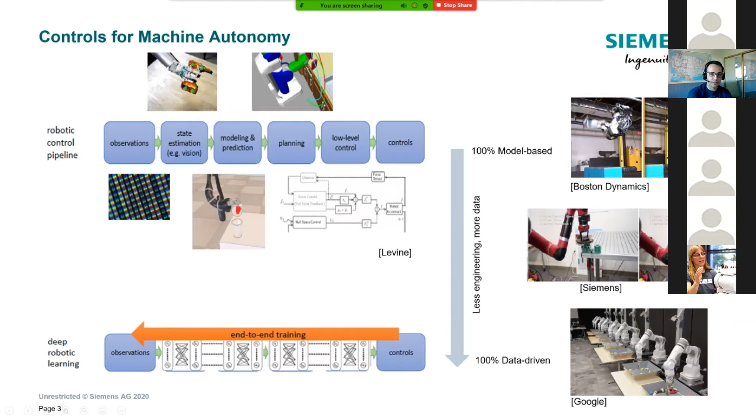But even within this continuum, the question arises: how do you compare different algorithms? What you're seeing in the video—hopefully these render—are robots trying to do different types of tasks, some failing, some succeeding. In the end, what we want is to define these kinds of artifacts, these benchmarks, to be able to compare different algorithms.

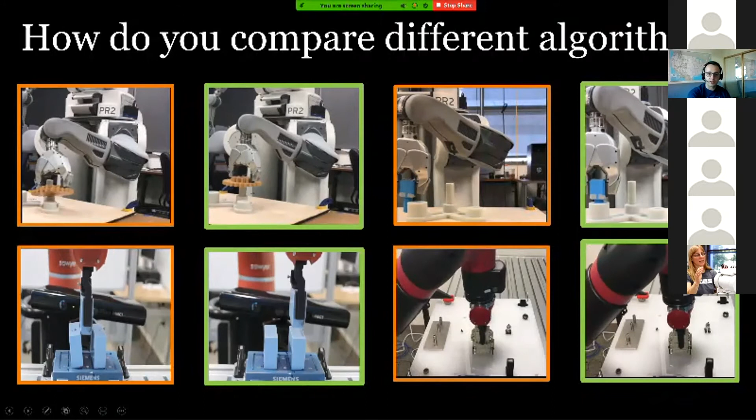I'll talk about all these different benchmarks in a second. This is part of our gear assembly—something we call the factory model. And this is the by-now-famous NIST board.

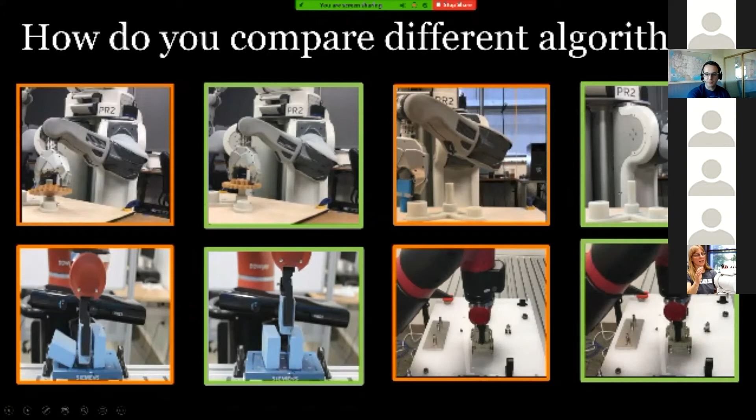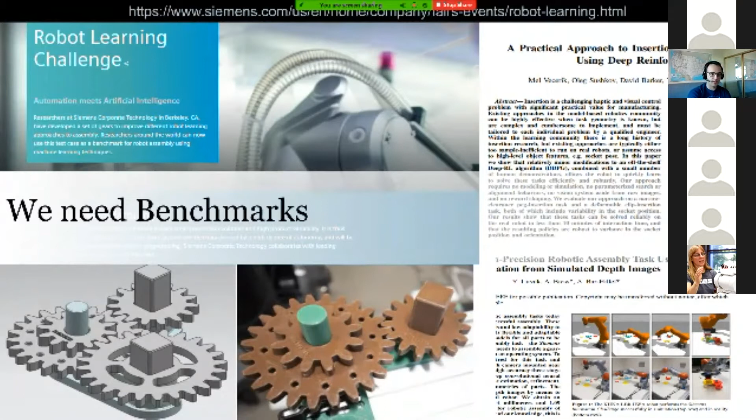So, we need benchmarks. I was also very happy to see in Joao's presentation that somehow the gears appeared there, and this has had a lot of utilization in different labs around the world. But what we really believe is that benchmarks accelerate innovation.

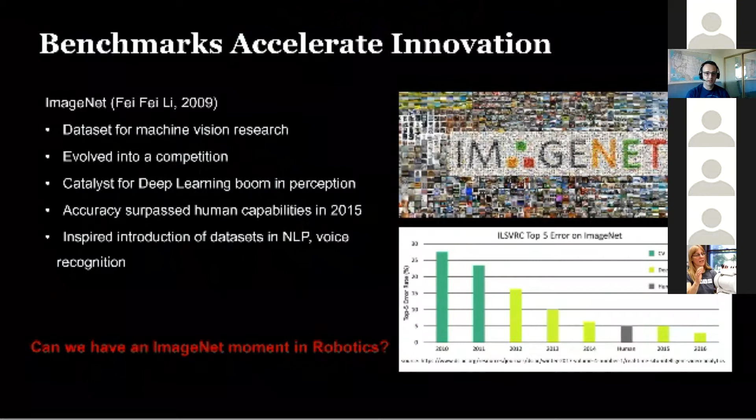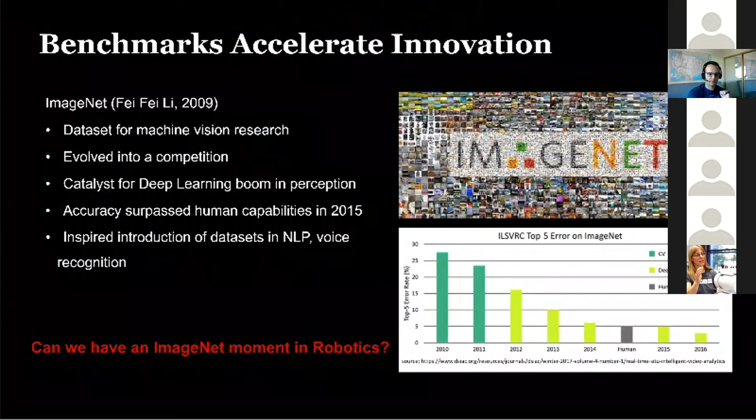Everybody knows about ImageNet and how it served as a catalyst for the deep learning boom in perception. The question is: can we have an ImageNet moment in robotics? Because that was really what accelerated the deployment of deep learning in computer vision.

Now, why benchmarking in robotics? This has been discussed in several other presentations. Every paper reports a different experiment, and it's unclear what the contribution is. We need to be able to reproduce results better, and we need to be able to say we are this good.

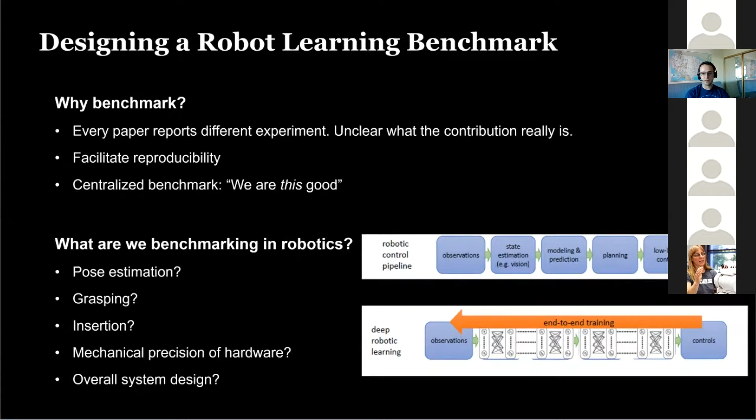But what are we really benchmarking in robotics? That goes back to conversations in other workshops I've seen at past conferences about what robotics really is. Are we just doing pose estimation benchmarking? Are we benchmarking grasping capabilities, insertion capabilities, the mechanical precision of the hardware, the overall system design, all of this together? And when we talk specifically about robot learning, it's very different whether you want to benchmark and learn for control versus learning for perception.

The performance really depends on the physical effects, and it's also not realistic to expect that every lab in the world has the same hardware and the same physical environment.

There's a really big difference between simulation and the real world. There was a really good workshop yesterday on sim-to-real, particularly when you talk about realistic tasks that want to find their way into manufacturing. There are things like OpenAI Gym, where you have environments, not just agents, but these are mostly academic scenarios, not suitable for manufacturing. As much as I like to see dinosaurs learn how to play soccer, as in some papers, it is also limited in applicability because of the simulation.

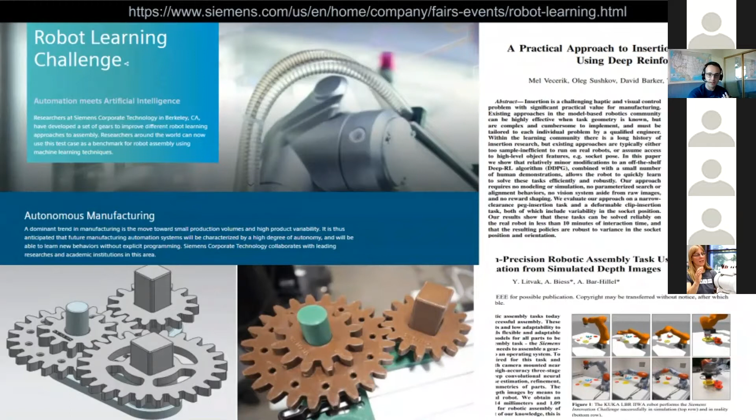It's only in simulation, so can we design a physical benchmark environment? That's what motivated us more than 4 years ago to create this robot learning challenge, where you can see the link on top. We decided to create a physical benchmark where researchers around the world can simply 3D print the parts and try out this assembly. It consists of different parts: two peg-in-hole problems with pegs that can move, and different gears, the three you see, and another one with a different pattern, so you don't overfit to a specific solution. Everything moves, so it gets very tricky. It's not easy to hard code the motions, because at the end, you need to find your way when assembling the gears.

This has been used by different labs in the world. For example, this is a paper from, I believe, DeepMind, and this is another paper from the academic world. We were very happy with the reception of this challenge and how different labs around the world have used it. But it's not that one benchmark fits all.

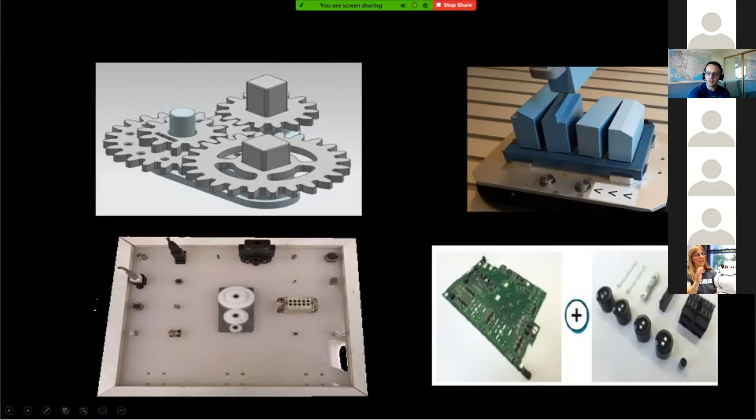It's not a silver bullet. So we also have, I'm going to report some results with a different kind of setup where things can also fall, and that may be also different and useful for different setups. But these two still are very lab oriented. One can claim that this is not a realistic manufacturing problem.

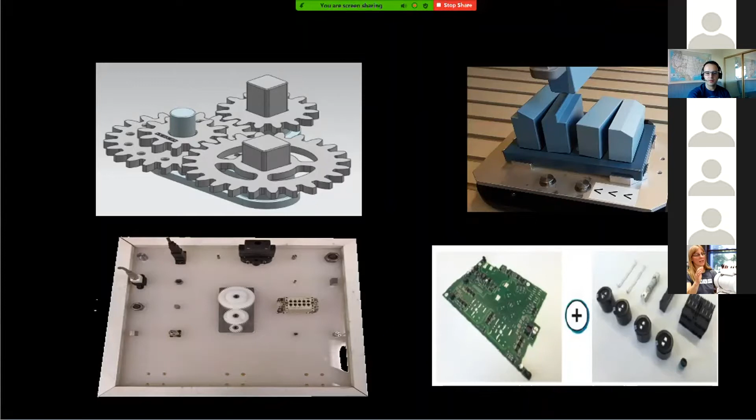We were also very happy to partner with NIST and do a lot of tests and work around the NIST board. But even there, that's also kind of an artificial environment. The next step, what we are pushing currently, is also using a realistic through-hole electronics assembly from a real product, and that will complement the full picture of benchmarks.

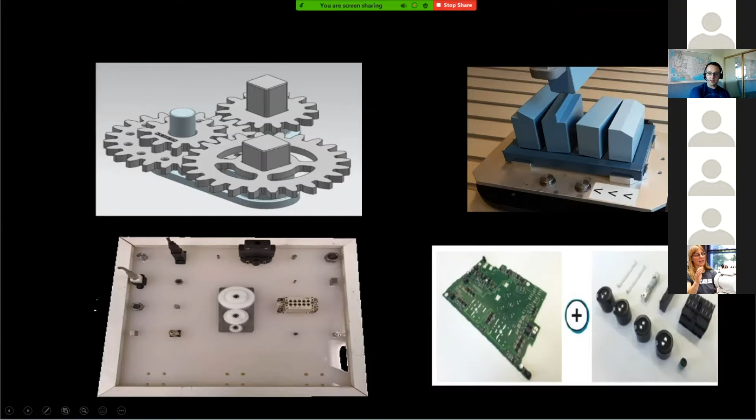Now, when we give these benchmarks around, or people want to tackle our challenges, it's not easy to just say, okay, report me your results. Because what we want is to answer different questions, and we really want to take a look in the details, because different setups are, it's difficult to say this is better than the other one. Because usually, the answer is, it depends. It depends on the conditions.

So the first question we always ask is, does it work? As you saw on the videos before, some robotic actions work and some others not. Also, how robust is it to perturbations, for example in lighting? Are you controlling the light or not for your perception algorithms? How well does it generalize? What if I place the components, if I move the board slightly, or the components you're trying to pick?

At what cost? It's very different if you use an Intel RealSense camera for $300 versus, for example, a Photoneo $10,000 camera. You get a very different output, but also that's what you pay for.

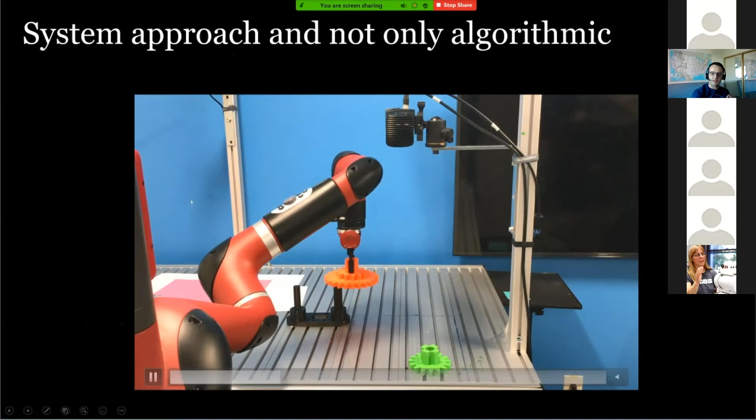Also, what cost in terms of data, how much data you need for training, and how much time it takes if you're learning the policy that finally works, and also how to set it up for another person to run it. These are the least academic questions, but if we want to transfer this into real manufacturing, that will be very important. And what are the limitations? As I said, in the following video, the way we made it work was also using a $10,000 camera, which produces these really nice point clouds, as you can see here. So we want to know also the setup. That's equally important as the algorithms you are using.

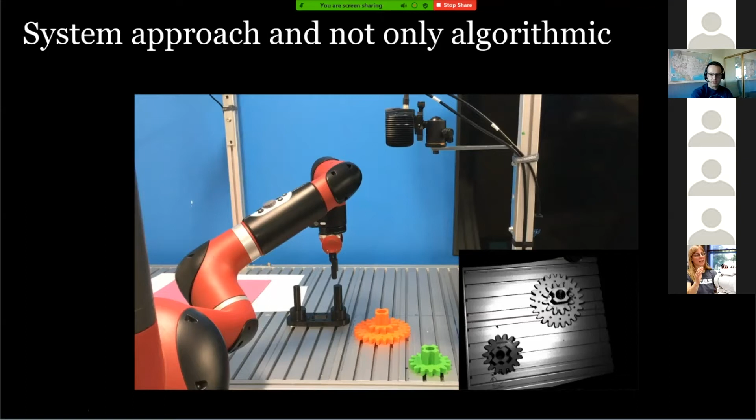Now that I've drilled the topic more on why we need benchmarks, I want to show you some examples on how we use these benchmarks in our research.

The first one is about our work in residual reinforcement learning. We want to solve this insertion benchmark where the blocks can be in any arbitrary position, and the goal is to insert one of these blocks in the middle without making the others fall down. The tricky part here is that the blocks can fall down.

In the gear example, the setup is kind of fixed, so you could get lucky and find your way through with a spiral motion. But here it's more tricky to do the exploration phase.

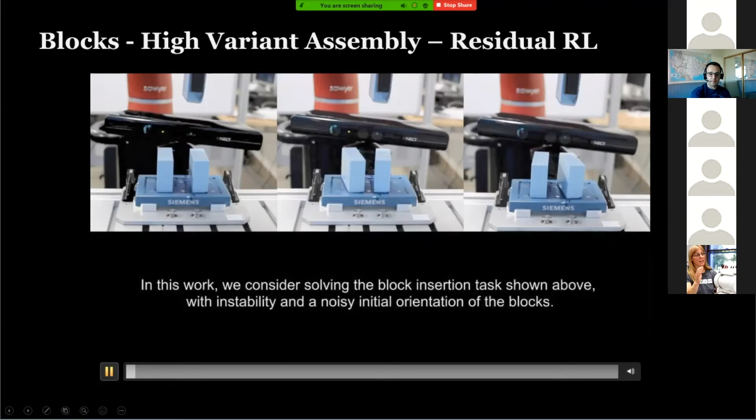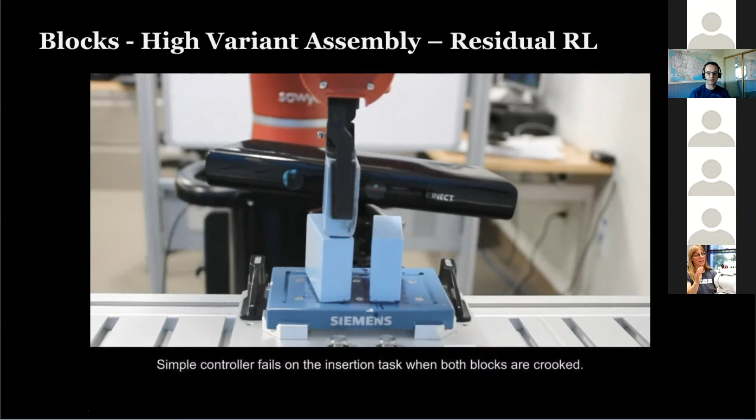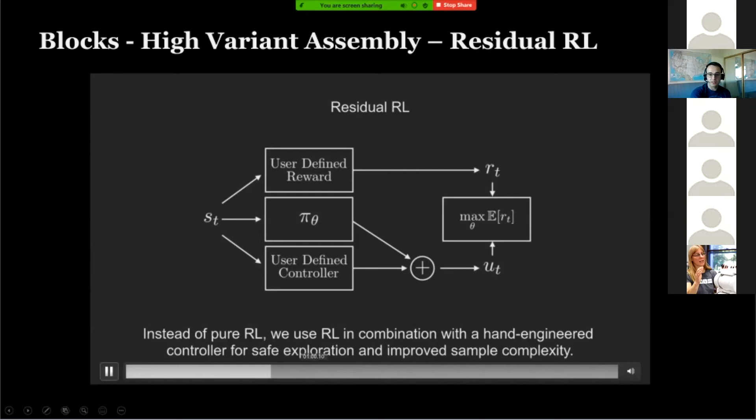As you can see, a simple hand-engineered controller would not work, because it will feel that it's touching something but won't know how to learn the motion of pushing things around, and will fail to accomplish the task. So these are results we published in the past on whether we can combine traditional control with reinforcement learning, what we call residual RL, to solve this kind of problem.

Only use reinforcement learning where it makes sense, when you have contact dynamics that are difficult to model. After about 3 hours of real-world training, the system finally succeeds. One important thing to report is the time it took to learn, your setup, how many cameras you use, your robot, your physical layout, and how you restart the system. If it's 3 hours of real-world training but you have a way to automate the resetting, that's very interesting, versus what we did, which was basically one of our students resetting the experiment for many hours, every time the robot fails and the blocks fall down.

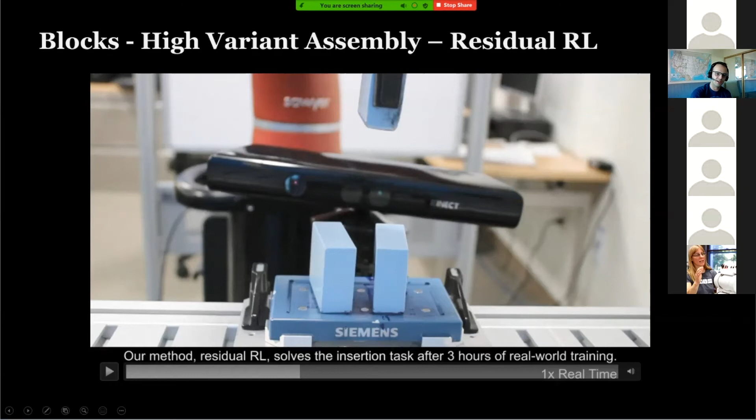A bit more: now that we were comfortable using residual reinforcement learning in our setup, we also used it with one of the NIST boards. This was very cool because it has a USB connector, and usually in reinforcement learning we define rewards using the final position of the objects being assembled. But if you have current readings, you can also use that as a reward, which was very useful.

As I said, state-of-the-art reinforcement learning for assembling this kind of task usually takes 12 to 24 hours of training time, and we reduced that to 3 hours. But 3 hours is still a long time.

So we continued our research, also using the NIST board, in the area of meta learning. Basically, meta learning means learning to learn, and we have a 2-step process where we first do a long meta-training phase followed by a fast adaptation. We leverage simulation heavily to reduce this extensive training time.

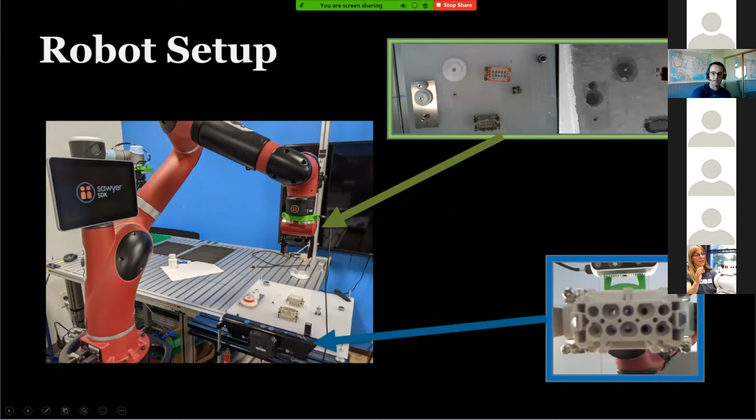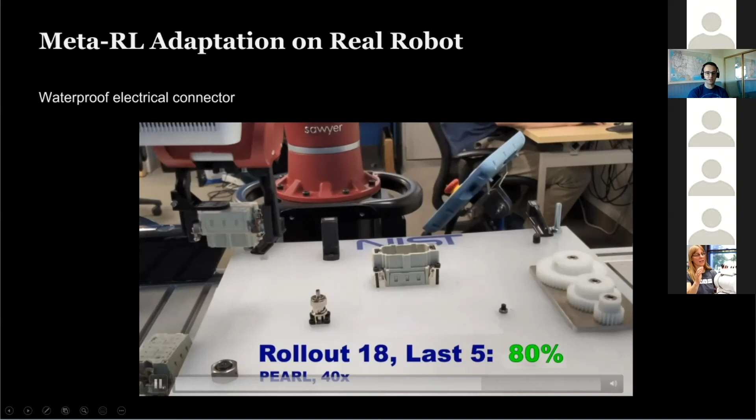As you can see in this video, after around 20 rollouts the system gets it perfect. Right now you're 80% accurate in the last 5 rollouts, and once you get to 20 rollouts, it's successful all the time.

We use the same kind of training to also assemble the gears you see here on the board, fast forwarding for the sake of time. Again, after 20 rollouts, it learns and is successful all the time.

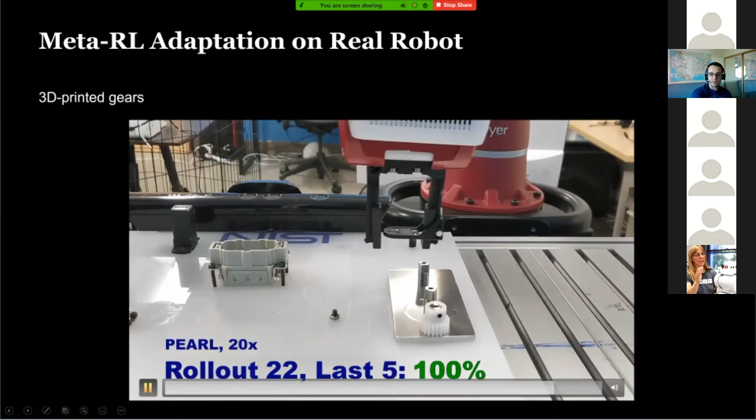And finally, what we wanted also is to use the same policy to also train in the board.

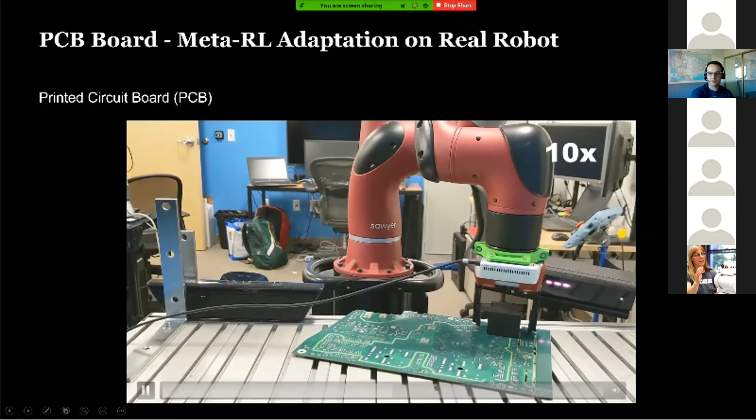But as you can see here, this is also another benchmark. Just to conclude, this is my last slide. We learned that having multiple benchmarks helps. It also helps to really differentiate if this is just you assemble it by luck, or if you are robust enough, if your policies, what you have learned, can generalize. It's important to clearly define what is your scenario, what is your hardware and instrumentation, and what are the different modules that you are using, and what are you really benchmarking.

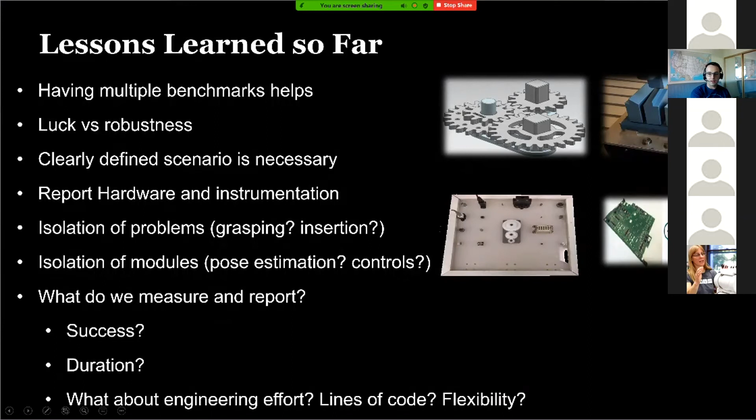What are your contributions? Is this on the grasping or on the computer vision part of things? And also measure things that are not obvious, like engineering effort, lines of code, and flexibility. So that's it. If you have any questions or ideas on how we can create the next version of our benchmarks, we are happy to discuss that.

Thank you very much. Yeah, I think the idea of quantifying the amount of learning is a very interesting problem. You presented two cases, one measured in hours, let's say, and another in the number of attempts before reaching competency. Are there other simplified measures like that we could apply to learning to help characterize it?

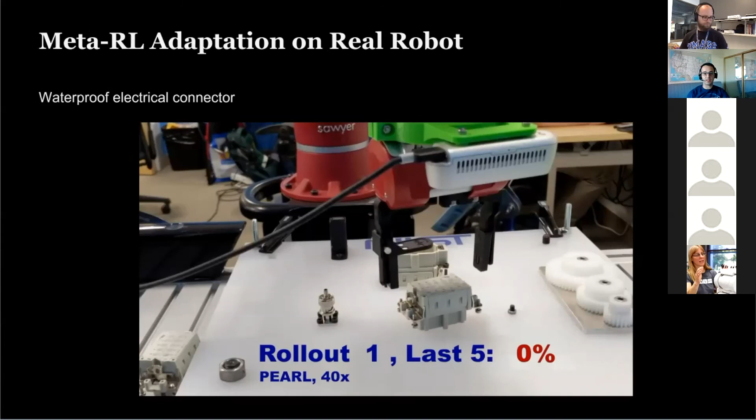Well, one of the biggest ones is also the training time, right? How long does it take to learn the different policies? At the end, with this, for example, this meta-learning, what you do is instead of having a traditional data set where you fit your model, you have a set of data sets, and the robot has to figure out in real time which one fits the problem at hand.

So it's very interesting also to see when this will break, because it depends on how well you can simulate the problem in your simulation and how much it can generalize. All the tasks that we have seen here are kind of similar, it's just putting an object and inserting it, but we haven't tested if the same policy can really generalize to something completely different.

So training time, also to your point, is something very important. Also, do you need human intervention? That was also something that would be very interesting. If you can restart your problem automatically versus if you need a person for some amount of time to restart the problem while you are learning.

Human intervention can basically increase the cost of learning, if you want to frame it that way. Yeah, also safety plays a role, right? Is the robot, can you ensure that this will do just the motions that are safe, or do you need to constrain it somehow?